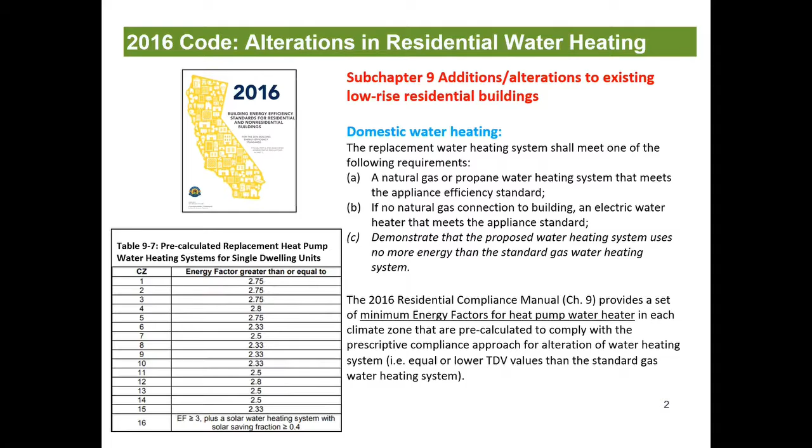So Danny actually did a bunch of calculations and was able to come up with this table that you see on this PowerPoint. These are the minimum energy factors for heat pump water heaters in each climate zone. And based on these energy factors in each climate zone, he explained that this is a pre-calculated compliance with the prescriptive requirements in Title 24. So that was great. So based on this table, we can then launch this pilot program, and that was launched about 2 years ago, in 2016. We had this heat pump water heater rebate program to incentivize our homeowners to switch from gas water heaters to heat pump water heaters.

Actually, I forgot to mention that for Palo Alto, our building electrification efforts are primarily focused on retrofit activities. There's not a lot of new construction opportunities because the city is pretty much all built out. Any new construction opportunities will come from a complete tear down, whether it's on the commercial side or on the residential side.

So the heat pump water heater rebate program primarily targets homeowners to replace their existing gas water heater with a heat pump water heater, and we have pretty generous rebates of up to $1,500 to homeowners to do this work, and they do have to pull a permit to qualify for this rebate. We've done a lot of work in the space of heat pump water heating, which we consider the lowest hanging fruit in terms of building electrification, in terms of both potential to electrify and reduce gas consumption, as well as the cost, aka is it cost effective from a customer perspective.

So in this slide here, I put down some bullets of the work that we have done. We have the heat pump water heater rebate program. We've run workshops with representatives from all the leading heat pump water heater manufacturers in the last 2 years. These workshops are run jointly with Passive House. I think a number of you here probably have met Bronwyn, and she's great. So we have these workshops that we co-host with Passive House. We've done a lot of work also with the CEC to streamline the permitting process to switch from gas water heater to heat pump water heater. And earlier this year, we hosted an open house for the first all-electric multifamily building in the city of Palo Alto.

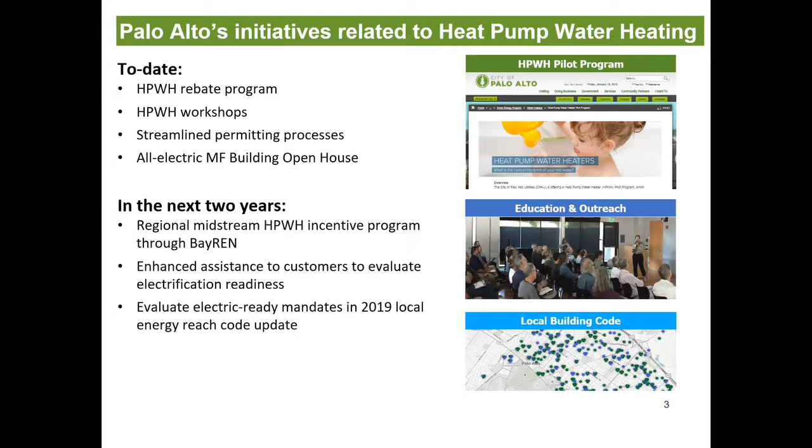On the space heating side, which was also in our 2015 electrification work plan, is to help our homeowners in Palo Alto convert from gas furnaces to heat pump space heating. So when I brought this up to the CEC and said, hey, you guys have this nice simple table with a minimum energy factor for heat pump water heaters, can you do something like that on the space heating side, rather than requiring each homeowner to calculate the TDV, which I can't even imagine how to explain to our homeowners. I don't know how many of you here have heard that term.

TDV is strictly a Title 24 cost metric. It's an energy budget. I have a really hard time explaining it to my managers and my boss's boss and my boss's boss's boss. Nobody understands TDV, and if I had to explain this to customers, it would be very painful. So in the current code, in Title 24, if a homeowner wants to replace an existing gas furnace with a heat pump space heating system, they need to demonstrate that the TDV of the new system is lower than the standard gas furnace system.

It does have some language here regarding what this replacement system consists of. It includes the heating cooling equipment. It includes an entirely new or replacement duct system and a new or replacement air handler. So I think there's a loophole if we're reading this correctly. If a homeowner only wants to replace just the gas furnace with a heat pump without touching the ductwork, without touching the air handler, they could, because it's not a complete system replacement.

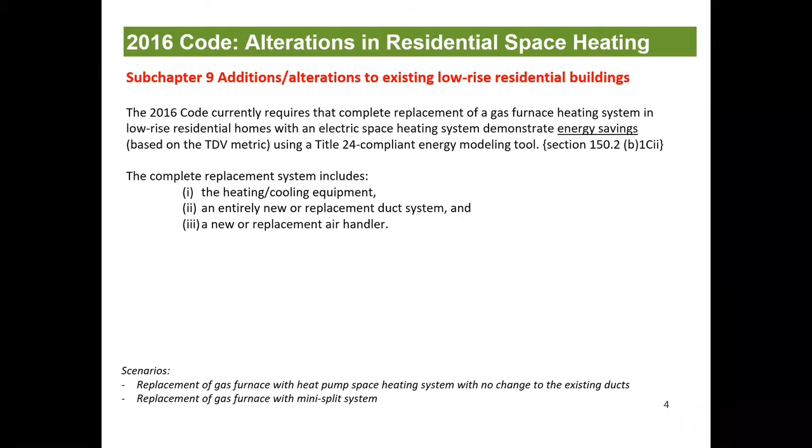So we're out of time. But anyway, this is just the background. So the CEC said, look, it's a lot more complicated. It's not quite as simple as coming up with a single number for each climate zone. So we thought, okay, we will try to run an energy modeling study. We spoke with Owen Howlett from SMUD, and we did this joint study. We hired a consultant, TRC, to do the modeling work for us. And there's a lot of parameters that we need to consider. Our objective is to quantify the energy savings: therms, kBTU, TDV, kilowatt hours.

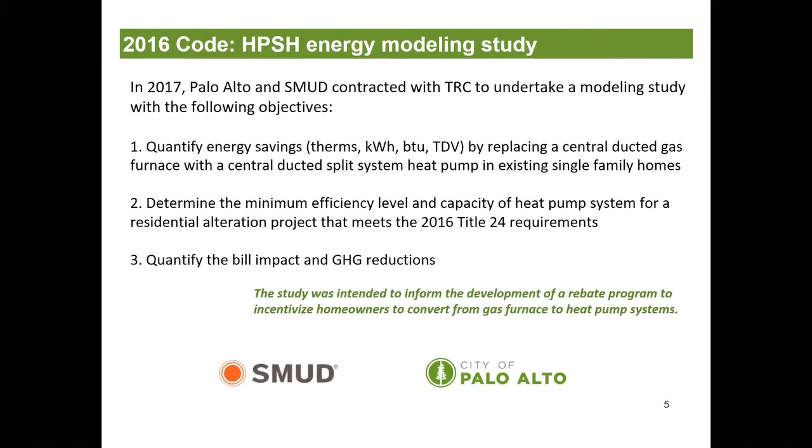We want to look at what is the minimum efficiency level and capacity to replace a gas furnace for a specific home. And homes can be very different in terms of their vintage, their square footage, the shell insulation, and we also want to quantify what the bill impact is from a customer perspective. The intent of this study is to put together a pilot incentive program to help our customers switch from gas furnace to heat pump space heating.

As part of this study, there's a lot of parametric modeling work done by TRC using CBECC-Res software. I'm showing in this table what the baseline system would look like, either a gas furnace or a heat pump system. In terms of the input parameters covered in the simulation, we looked at the size of the homes, and these are the prototypes currently in the CBECC-Res software. The vintages: depending on when the home is built, the shell insulation is very different because of Title 24. Anything pre-code, pre-1978, will be a lot leakier, and homes built after 2001 are much tighter.

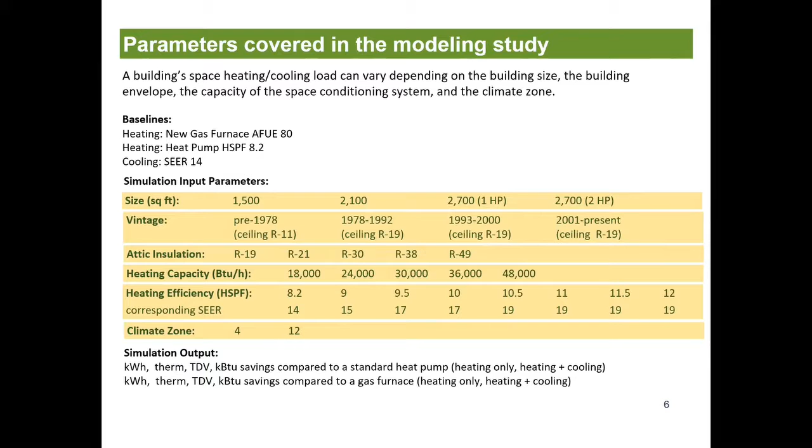We looked at the heating capacity. The energy consumption of the heat pump could vary depending on the capacity of the heat pump system, and also the HSPF. The HSPF is for the heating efficiency, and the SEER is for the cooling efficiency. So we can get into the heating and the cooling part. And then we looked at both climate zone 4 and 12, which is where Palo Alto and SMUD are located. Palo Alto is a much milder climate, so for the most part we don't have a lot of cooling needs, but that's not the case in SMUD. SMUD definitely has a more extreme climate, where they need both heating and cooling.

This is a screenshot of what the output of this model looks like. We have this input box on the left; as input, you can have different vintages. You can put in the size of the home, the HSPF level, the capacity of the heat pump, and whether we're only looking at the savings from space heating or from both space heating and cooling. And it's compared against the baseline of either just a gas furnace or a standard heat pump, which has an HSPF of 8.2. That's the federal minimum standard.

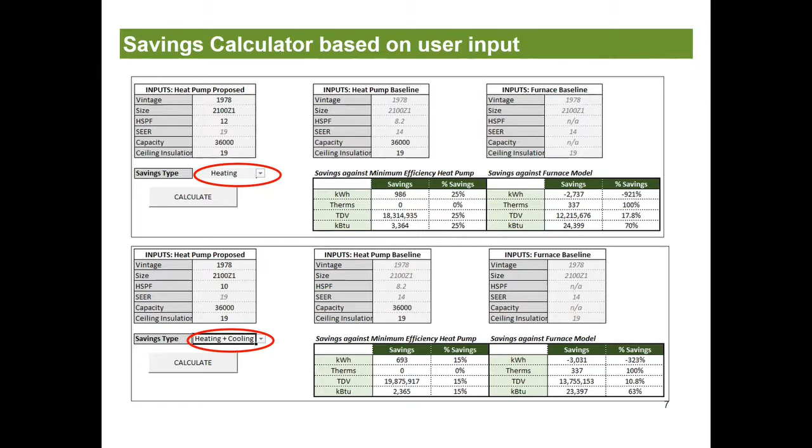So if I had to squint and make a judgment call, if I had to design a rebate program, our recommendation would be, for any homes less than 1,500 square feet, we will require that the heat pump system that goes in has a minimum HSPF of 10 and a minimum 2-ton capacity.

Depending again on the size of the home, we have different HSPF and tonnage requirements. I try not to look at the vintage because sometimes people may not be as aware of the vintage of the home or the exact vintage of the home. So we're looking at just the square footage of the home. So this is for the TDV requirement if the home only has space heating.

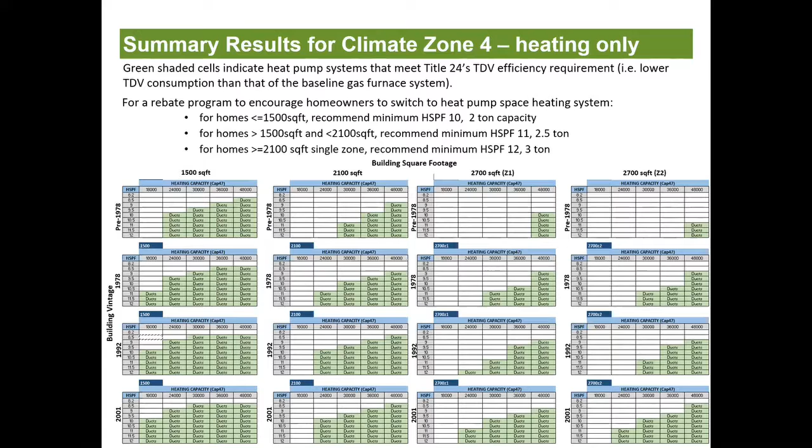If we're looking at space heating and cooling, then it's actually more lenient. We can accommodate the TDV requirement with a lower capacity and a lower efficiency heat pump system. So I highlighted some of the additional systems that would otherwise fail the TDV equivalence requirement if the system is only running on heating only mode. So this is good. This is just to meet the CEC requirement in Title 24.

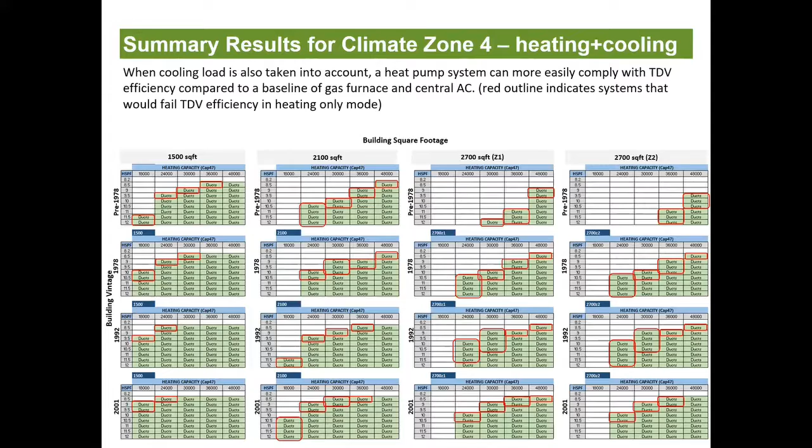So now let's look at the bill from a customer perspective. For Palo Alto, we have a tier rate system. We don't have AMI. We have tier 1, tier 2. I have some of the rates outlined in this slide. And when we look at the bill impact from switching from a gas furnace to a heat pump system, it doesn't look all that good for Palo Alto. The customer most likely will experience a bill increase. That's because we have a pretty low gas rate compared to PG&E.

Our electric rate is low, but not super low, not nearly as low as Silicon Valley Power, which is also in climate zone 4. So in this table on the right, if it's running on heating only mode, it doesn't look like it would pan out from a customer perspective, which gives me some reservation whether we want to put together and implement a rebate program. If it's SVP, then this is a no-brainer.

From a PG&E customer perspective, this is really expensive to electrify because their electric rate is really high. I think it starts at tier 1 at 21 cents per kilowatt hour. So it's very expensive to electrify for a PG&E customer.

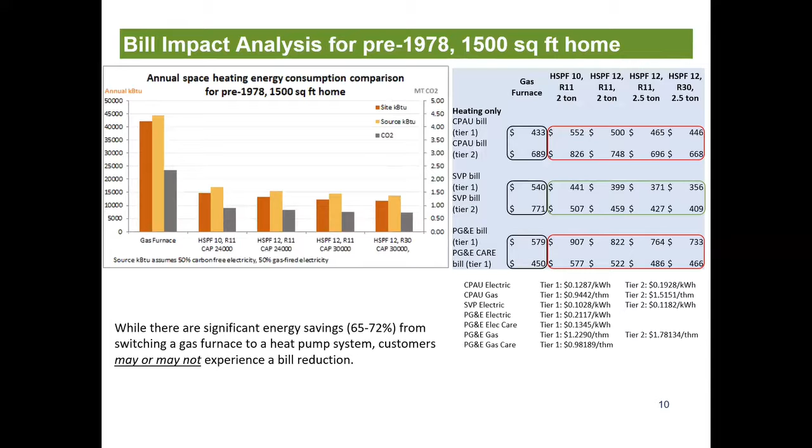So I did something similar for a bigger home, looking at both the heating and cooling bill, and we have the same conclusion. It doesn't quite work out from a Palo Alto and a PG&E customer perspective, but it is cost effective for a customer in Silicon Valley Power, which is in Santa Clara.

Did you inspect to see what efficiency level would be cost effective, and did you investigate adding solar to cheapen costly electricity? For Palo Alto, starting the beginning of this year, we have moved to a NEM successor program. So any solar generation that's fed back into the grid is only paid out at our wholesale cost, which is about 7.5 cents. And if they have to use the electricity from the grid, like let's say at nighttime or off peak, they are paying 12 cents.

Yeah, so we did run the numbers for a higher attic insulation. It still doesn't quite pan out. And I just want to comment, for SMUD territory, it is less expensive. Right, so for SMUD, this would make sense. This is economical from a customer perspective in SMUD.

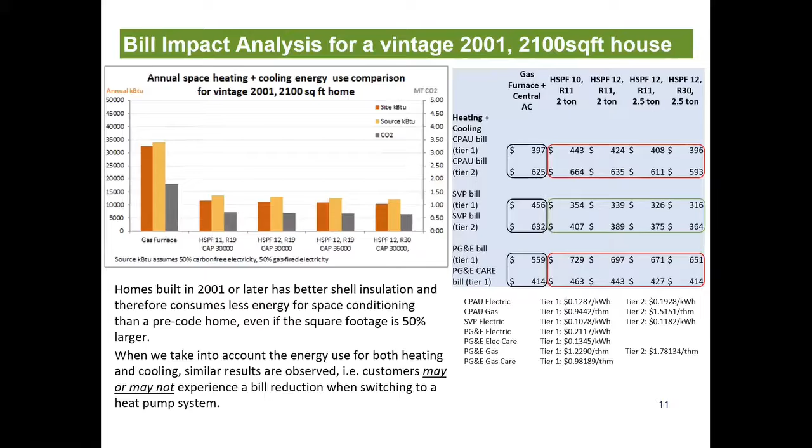I'm wondering why you jumped to an R30 in the roof and still maintain 2.5 ton. I'm just showing some snapshot. I really simplified the results of this modeling study. There were thousands of simulation runs, so I'm just showing some snapshot of the results here. Yeah, I could run it all the way to R49, 4 ton. I think I'm being ushered out.

So in terms of next steps, we have for now put a hold on implementing or designing a rebate program to electrify space heating. We are doing a cost of service analysis to see what we can do to help customers who are thinking about electrifying their house. We don't know. Well, we have to meet Prop 26 cost of service, so we can't just arbitrarily raise our gas rate.

We do have a grant that we received from BAAQMD, and we will be looking to implement a multifamily gas furnace retrofit program. We're targeting primarily low-income multifamily buildings, Section 8 housing, to pull out these very inefficient gas wall furnaces and put in heat pump systems.

And at some point when CBECC-Res software has ductless mini splits heat pumps built into the model, maybe we will rerun this study with the mini splits. We're working on it.